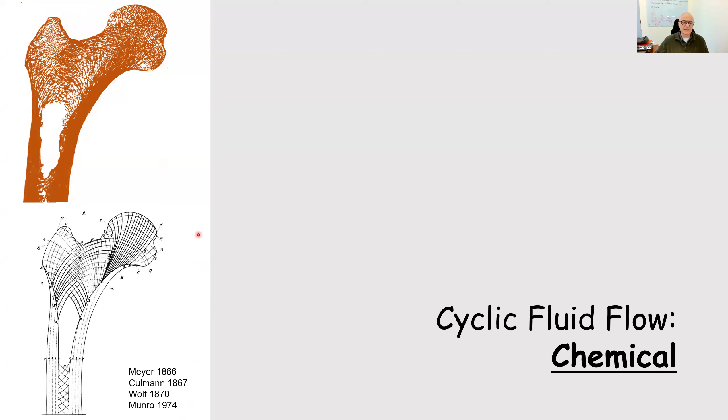So that was understood then, more than a century ago, but it was really not clear until 1974 when a paper said, you know, it is so important that we do exercise. And why? Imagine that the bone is made of the osteocanal and canaliculae that transfer the nutrients in and out of the bone to feed the bone, to maintain the bone alive and growing.

So what is the effect of mechanical action? Why does an astronaut need to be running with springs holding them back to replace gravity, so they don't experience bone mass loss?

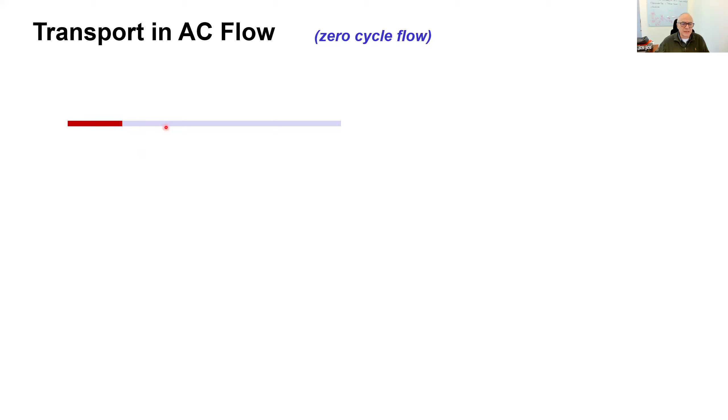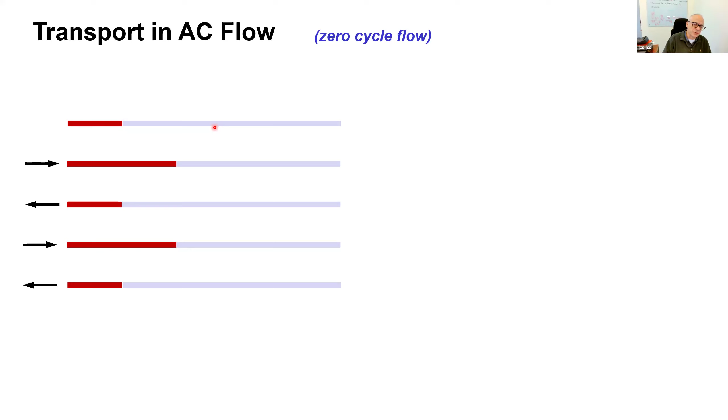Let's see what happens. Imagine I have a red fluid invading a tube, going in and out. The red fluid invades, then comes back, and the blue fluid pushes to the left, and vice versa. So nothing really happens. Now imagine this is a canal, a tube, but with large pores in the bones.

These pores are called canaliculae and lacunae, using the Latin words for lakes and canals. So the red fluid invades, and when it reaches the pore, it puts some of the red into the pore and mixes with the blue, and you see the color emerging.

Then when it's pulled back, some of the blue comes with it, and more blue invades the pore. Then we push it back in, and some of the red that was in the pore is pushed to the next pore. All of a sudden, by going back and forth, there is zero effective fluid flow, yet there is transport of species.

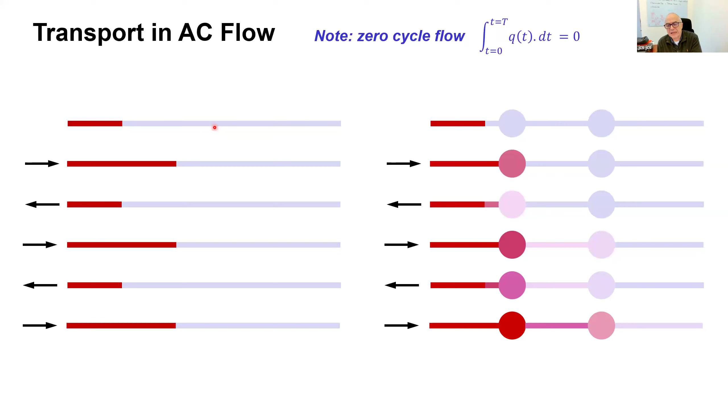So there is transport of a species with zero time-average advection. When we superimpose a mixing process with an advective cyclic process, you can convince yourself, if you carefully do the mathematics, that this begins to look in some asymptotic approximation like Fick's law: the first time variation of concentration is related to the second variation in space by the diffusion coefficient.

And what is the diffusion coefficient? Mathematically, you can prove it's the volume you are injecting over the volume of a lacuna, times the distance between lacunae squared, over the period of the cycle. What a beautiful equation - a length scale squared over a time scale, the essence of diffusion, scaled by the relative volumes of injection with respect to the characteristic internal volume of the system.

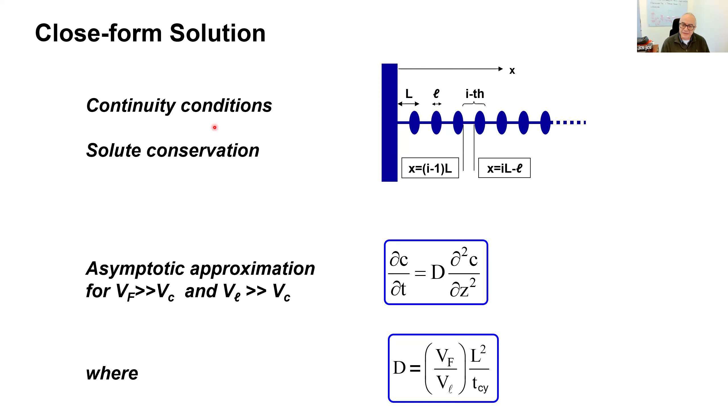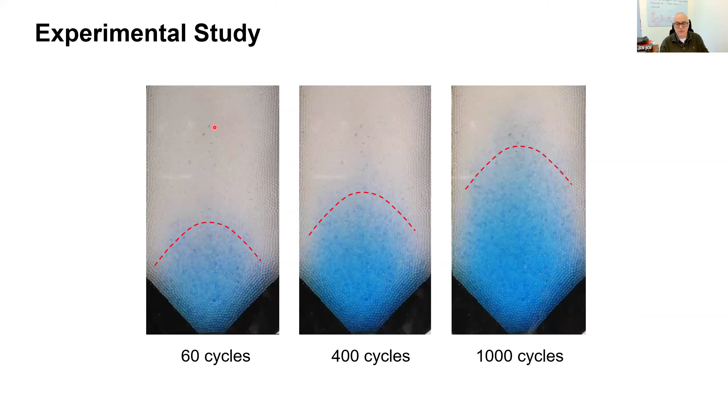Let's see if this is true. Here there is a glass bead pack with water, and we pull in and out water with methylene blue, always injecting and extracting the same volume. You see there is an effective diffusion front taking place - equivalent diffusion. This is much, much faster than pure diffusion, which almost vanishes in this context. Diffusion is on the order of 10 to the minus 9 meters squared per second, but these are much faster processes because of this scaling relationship.

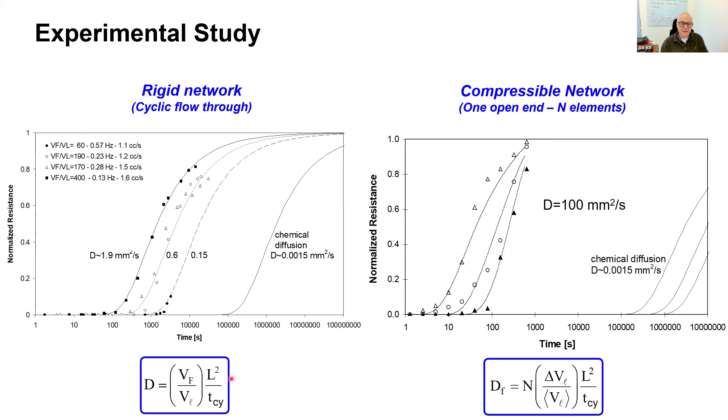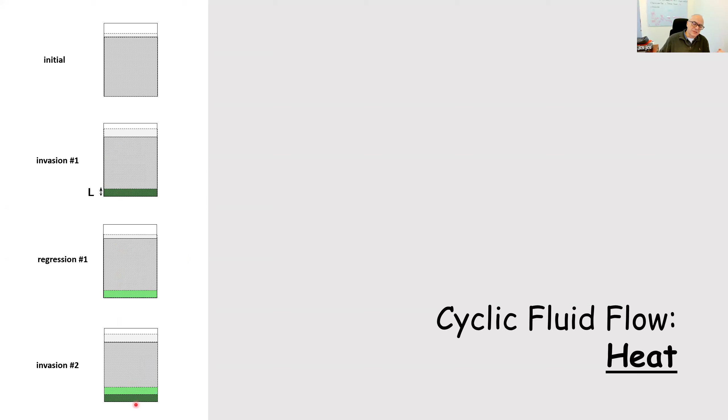So we can accelerate transport by injecting and pulling, injecting and pulling. Now, if that happens with chemical species, what about heat? Could I inject a hot front, leave some of the heat in the glass beads or the matrix, pull the water out, inject new hot water in, and will there be transport?

Well, first we need to see that there is an internal time scale, not for mixing, but for heat exchange. If you take a grain, put a thermocouple inside, dip it in hot water, then bring it to cold water, there is a characteristic time for that grain to transfer its heat to the cold water. That characteristic time appears in an exponential, as t over tau, and that is a very characteristic time.

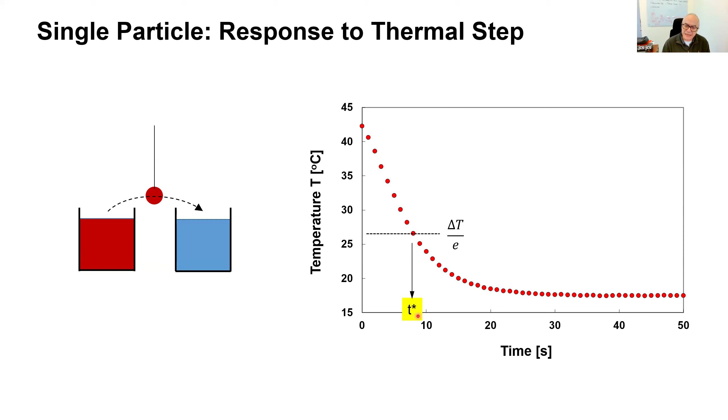In this case it takes a few seconds. So we want to inject water and let it stay long enough so the grains absorb the heat, then pull it back out, then inject back in, allowing that internal time scale to manifest. When we do that mathematically, all of a sudden we've reached something equivalent to the diffusion equation, but now for heat transfer.

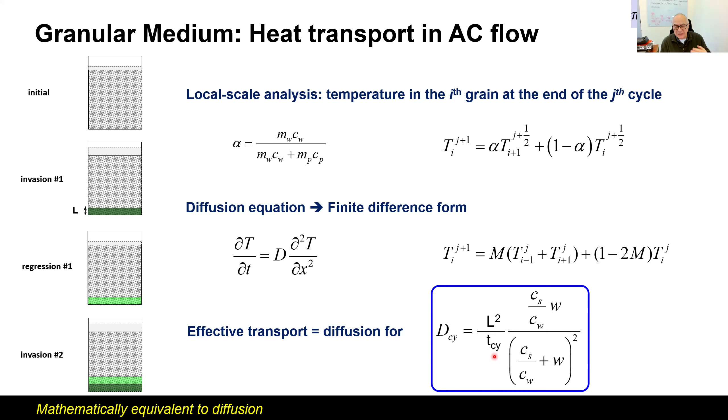Now we are in Fourier's realm. The diffusion coefficient is also scaled by the specific heat and the volumetric water fractions, but most importantly, it's related to an internal length scale and the characteristic time scale of the cycles. Just so elegant - we can very effectively transfer heat this way without having permanent advection.

We did this with a column. The column has thermocouples all the way along, and indeed we confirm that this is the case.

Now there are other processes in our body interacting through cycles. For example, we breathe in, and in cold weather like Alberta today, or even Atlanta today, the relative humidity in our heated rooms will probably be on the order of 40% or less. However, when we breathe out, that dry air that went into the lungs comes back out through lungs saturated with water.

That is where CO2 and oxygen get exchanged with the blood system. So when we breathe out, it picks up not only the CO2 but also moisture, and the breath we exhale is pretty much at 100% relative humidity. That means every time we breathe in and out, we lose weight because of the CO2 and moisture lost.

CO2 is heavy compared to oxygen, but we also lose weight because of evaporation. We release water. If you measure yourselves before you go to sleep at night and when you wake up in the morning, you'll see that you lose 200 to 300 grams, primarily water that you have lost. So we reproduce this in the laboratory.

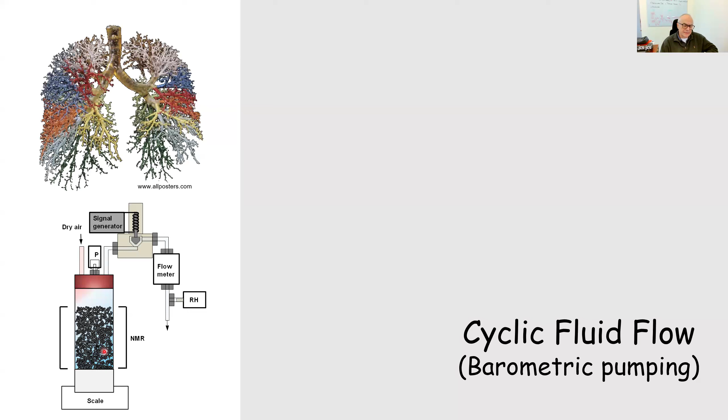This is the granular packing in order to understand the atmospheric interaction with the subsurface, where the subsurface is unsaturated. There is a very precise protocol that we follow, and we measure the relative humidity coming out, etc. We put the specimen inside the nuclear magnetic system so we can see the evolution of moisture content. Indeed, we have a very effective way of transporting moisture out of the granular medium, the atmosphere-subsurface interaction.

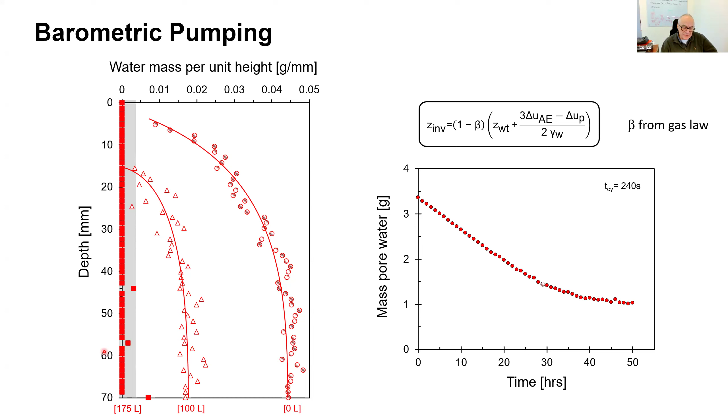Similar to our lungs. Now, something else happens in our lungs during these cycles. For those of you in petroleum geomechanics, I think you'll find this of interest, but this applies to all unsaturated soils as well. In our lungs, we have something that looks like detergent. Detergent is a surfactant. What we have in the lungs has a fancy name, pulmonary surfactants. Pulmonary refers to the lungs, surfactant meaning detergent.

So every time we breathe in, the alveoli expand, and at that point the interfacial tension of the water on the surface of the alveoli is pretty much the interfacial tension of water in a glass, 72 millinewtons per meter. However, when we breathe out and the alveoli contract, all the surfactants come close to each other and they repel each other, bringing the surface tension dramatically down, to less than 10 millinewtons per meter.

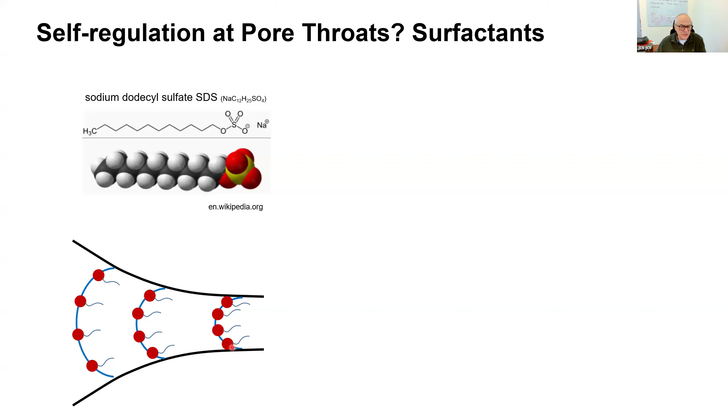However, if instead of these very small molecules, small compared to particles, we had particles instead of molecules, the particles would form a shell, and the surface tension would go crazy. Instead of being in tension, it becomes in compression, and you see that when a droplet contracts with nanoparticles on the surface, it actually buckles as a shell. So there are lots of processes that happen every time we go through a pore throat in a soil, a sandstone, or a shale.

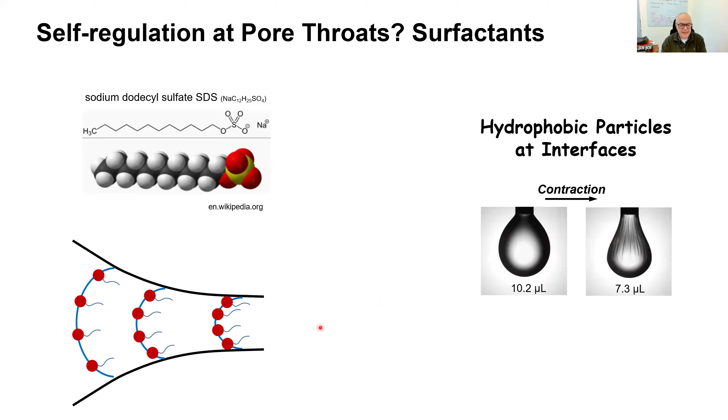Now, there are many other cycles in our lungs that we think happen, and we can use this in natural and engineered systems. One is the many cycles in our bodies, and the other I would like to highlight is the pumping of the heart. As you see, it's not very regular—it produces a high pressure pulse, and then it decreases.

Why does the heart work like that? They have tried to replace the heart with artificial hearts, which are peristaltic pumps just continuously pushing the blood, and the body doesn't like it. So why is it so important that we have these pressure cycles? It would probably take a longer time to discuss, but let me tell you some of the things we can do in geomechanics.

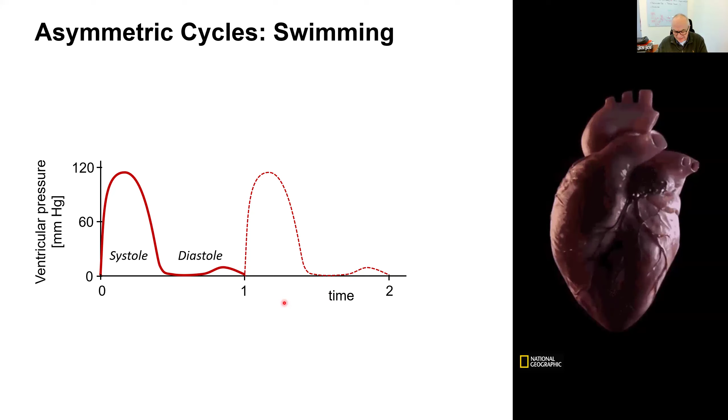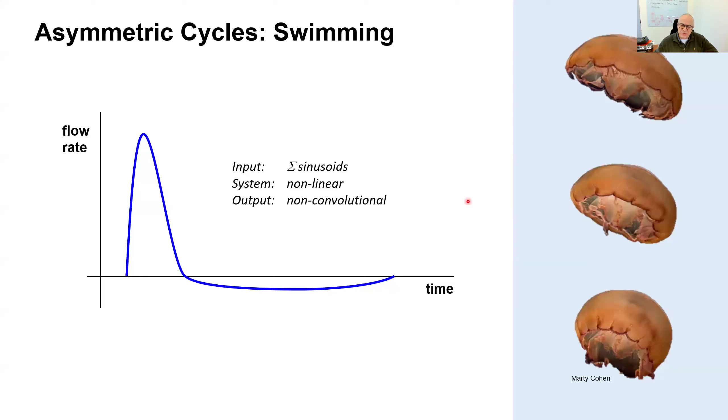With a syringe, I'm going to pump water fast. When it goes fast, it drags the particle. Now I'm going to pull the syringe back, but very slowly. At this point, the drag force is not high enough to drag the particle, so it remains. Then we pump again, push the particle, and withdraw the water slowly. We push the particle, and indeed we cause fines migration, and we can migrate proppants.

Very interesting opportunities for hydraulic fracture and reservoir preparation for production.

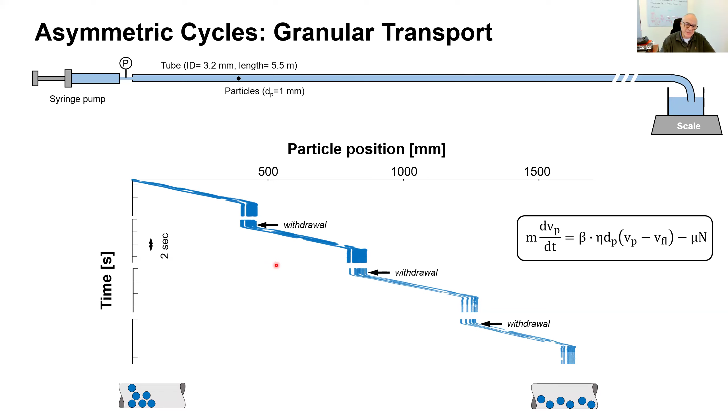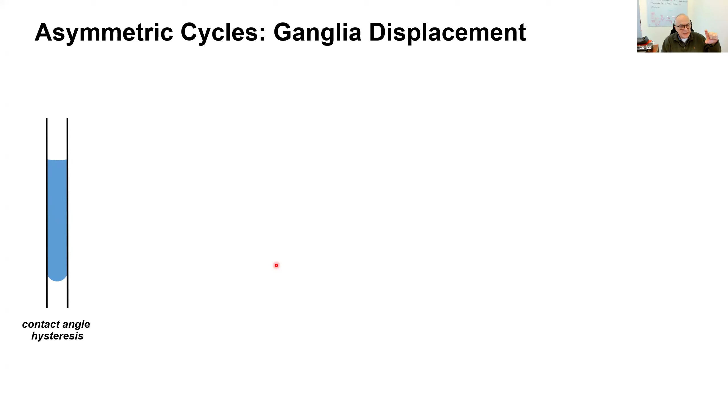We can do the same if you take a test tube. By knocking the test tube and counting on the contact angle hysteresis, I can move that droplet up, or I can move it sideways at will. This is experimental data to show you.

Cyclic effects on fluids are beautiful, folks, for mixing, for species transport, for heat transport, for moving particles throughout the system. Really exceptional opportunity. Now, many of you are in geomechanics, and that is an amazing program in geomechanics.

So I'm going to jump now to a few examples on geomechanics. We have to realize that the soil can experience different stress paths. This is in tau-sigma space, the q-p space, but it's basically shear versus mean stress.

It could be, how does a point feel on the side of a laterally loaded pile, or on the sides of a vertically loaded pile, or in a pile subjected to deviatoric loading with fluctuation of the water elevation, or just repetitive loading on a foundation. So we have different stress paths.

What happens to the soil? If you take the standard constitutive models, elasticity of course, but even if you take Cam Clay, once you push the yield surface out, then when you come back, you're done, you're in the elastic regime, so you cannot push the yield surface out anymore. Clearly this violates the fundamental constitutive models that we use in our field. So how does it really work? Let me give you a few examples.

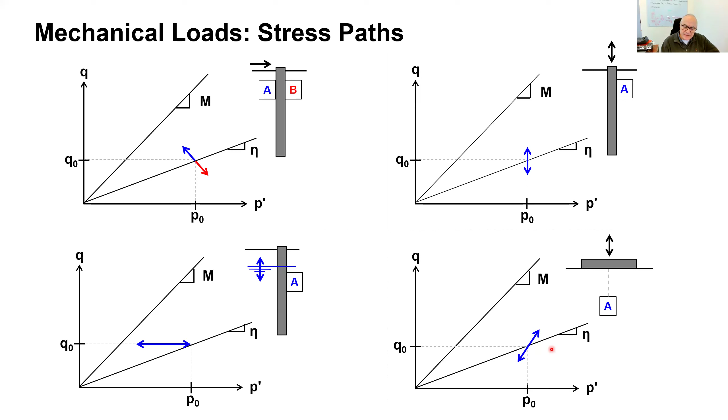The first one is, if you do this in an oedometer with zero lateral strain, you prepare a specimen, load it monotonically in different steps, and then at this step you unload and reload, unload and reload. We go through 10,000 cycles, and you see that the void ratio has decreased significantly. Then we keep loading, and the material goes back towards the virgin curve, but it has experienced this aging, this compaction due to repetitive loads.

Let me tell you something important here. The strain levels in each cycle may be very small. Each cycle may be causing an elastic strain on the order of 10 to the minus 5, 10 to the minus 6, and still leads to the accumulation of volumetric strains. Of course, if it is dense, these volumetric strains are going to be smaller than if it is loose, but still it is going to happen.

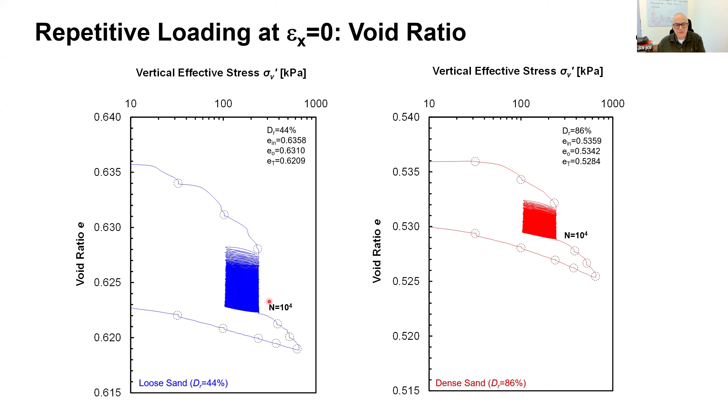This equation fits most of this volumetric data very well. It's a form of a power law. If you take the terminal void ratio, which is at an infinite number of cycles, it will go to an asymptote. This whole process will have an asymptote at an infinite number of cycles. How do I know that? Because the volume cannot go negative. At some point, the volume of voids will decrease, but it cannot go less than zero. In fact, it goes to a characteristic value for each condition and loading sequence. So I have these equations, and I can predict this propagation now quite well with these empirical equations.

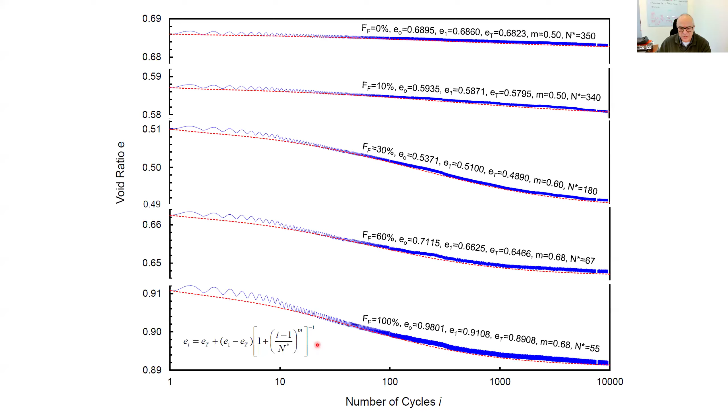Now what happens with the shear? We have to look not only at the volume evolution, but also the shear evolution. Shear is tricky, because while the volume will have to go to an asymptotic value, shear can continue accumulating in every cycle like a ratchet.

This is the classical drawing from Leonardo. Every time you turn, it locks in the new notch, and it keeps deforming, and the same can happen to a soil. But let me give you a hint: it will only happen when the amount of shear on top of the initial shear - this is the cyclic shear on top of the initial constant deviatoric load the system is subjected to - approaches failure.

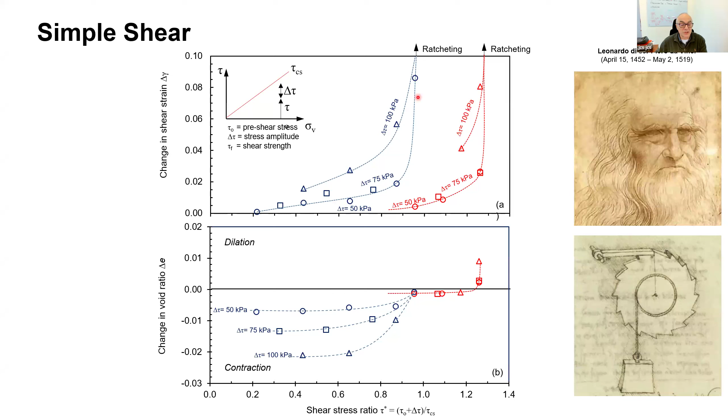If you are far away from failure, you are not going to ratchet. You are going to go to an asymptotic state in shear as well. That is called shakedown. Away from failure, you are in the shakedown regime. As you approach failure, you go into the ratcheting mode, and the shear strains will accumulate forever, and the slopes will continue going down.

So I already presented repetitive loading in K0. I'll show you the case of a simple shear now.

There are other ways to add changes in mean and deviatoric stress in soils, and one of them is by changing the pore fluid pressure. So we load the specimen to a certain deviatoric stress, we maintain the deviatoric stress, and we change the pore pressure, and it can bring the system to failure. But we control how far or how close we want to go.

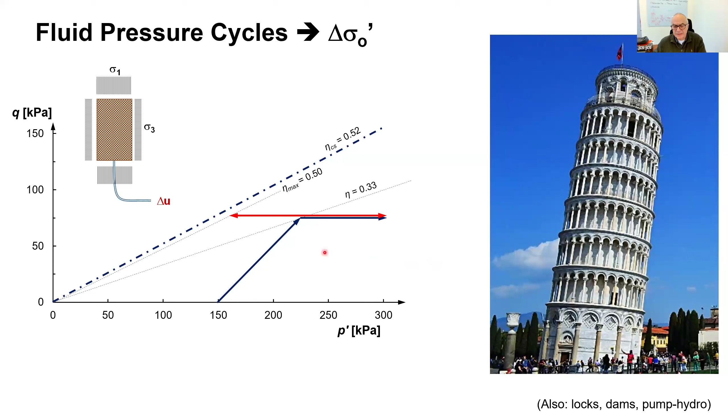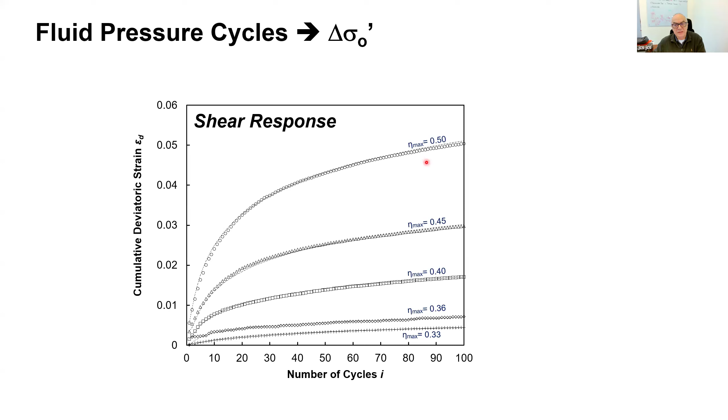That is, by the way, what was going on with the foundation of the Tower of Pisa with successive pumping. And indeed, if we are close to failure initially, close to the deviatoric load approaching failure conditions, we are going to have very pronounced displacements and accumulation of shear displacement.

So now, let's summarize what we have said out of these three cases. From a point of view of volumetric evolution, it has to go to an asymptote. You cannot have negative volume, so it will approach an asymptote.

This asymptote is not critical state. Critical state, by the way, doesn't really happen either, but critical state is an idealized limiting condition for monotonic shear. This is not monotonic shear, so it will approach its own limit state, an asymptotic state.

This is in volume. In shear, it can either stabilize at some point or continue accumulating shear forever, and that is the shakedown and ratcheting modes.

But as I said in the last slide, after a very large number of cycles, you are not going to have any more volumetric strains, but you may still have shear strains, and so we're beginning to violate normality.

So folks, we need new data sets, we need new models, we need new constitutive models, but we also need new numerical algorithms, so there is no numerical error accumulation.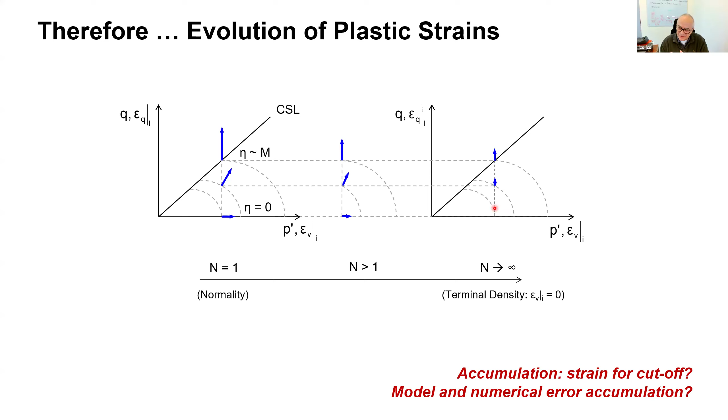And so every so often we have to check with asymptotic trends to make sure that what we are accumulating is not numerical error. As I mentioned in passing, you can accumulate strains at very, very small cyclic strains, much smaller than the elastic threshold strain that came up from the liquefaction literature. I think of Dobry and Vucetic, or Ishihara's data, etc., or the project by Robertson in Canada.

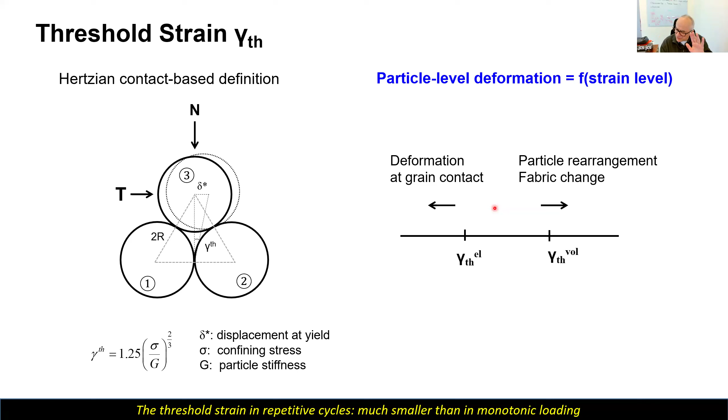We can have strain accumulation in cyclic processes. Of course, when we're thinking of 10,000, 100,000, million cycles, even if each cycle produces a very minute strain, that leads to very beautiful physical discussions that we can address later on.

So now to conclude, I'm going to give you some other examples. The third segment will be on other examples where the cyclic processes trigger coupled processes in our geomaterial. So let's take some examples.

But first of all, we have to say, why is there coupling? There is coupling for two reasons. One is thermodynamics, energy conservation, and it says that nature will conserve energy. The other one is Le Chatelier's principle, and it says that nature will do everything it can to oppose change. If you combine these two, you convince yourself that all forms of energy are always coupled.

For example, if you take a rubber band, not all rubber bands will give you this effect in a way that you can sense it, but try a few rubber bands, they all do it, but you cannot sense it with your lips. Try a rubber band, stretch it and feel it with your lips, and you'll see when you stretch it, it's hotter than when you just started. And then if you relax it, you will see that it will be quite cold.

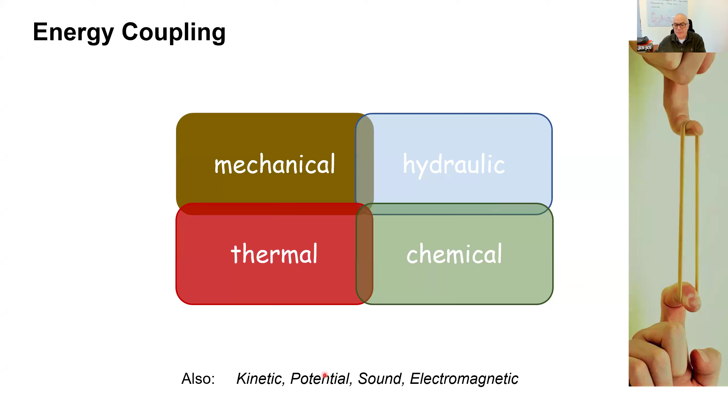Very clearly, we have thermomechanical coupling, and in fact, we have all these other forms of coupling. There are other forms of energy, and they're indeed all coupled. Let me focus on some of these examples.

Now we have to think of what is the nature of coupling beyond the global macro-scale physics. What is the causality at the particle scale in soils? Well, we have to think of all the forces that act on a particle.

The force that it has to carry for being part of the granular skeleton subjected to effective stress, the self-weight, the buoyant force, the hydrodynamic drag, capillarity, attraction, repulsion, thermoelasticity, and cementation.

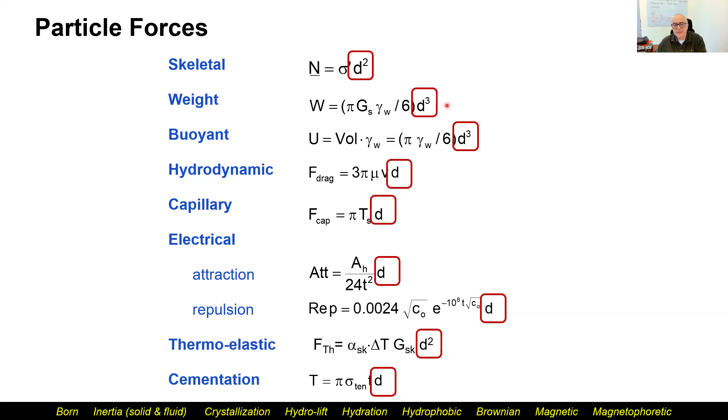Now you see that all of these are asymptotic equations. I purposely wanted to get them in a power form, either linear, quadratic, or cubic with the size of the particle. That means that when I plot these forces in logarithmic scale, they're going to have a slope 1, slope 2, and a slope 3, and the lines are going to intersect. What does that mean?

Well, for example, the self-weight of a particle is equal to the capillary force that particle can experience until the particles are about 3 millimeters. Large particles, self-weight is more important than capillarity. You cannot pick up an orange with another orange just by wetting it. However, you can pick up a small grain of sand with another wet grain of sand because the capillarity at that point is greater than the self-weight. And that is the essence for sand castles. I can do the same with all other forces and convince myself that there are different regimes where one force governs or another force governs.

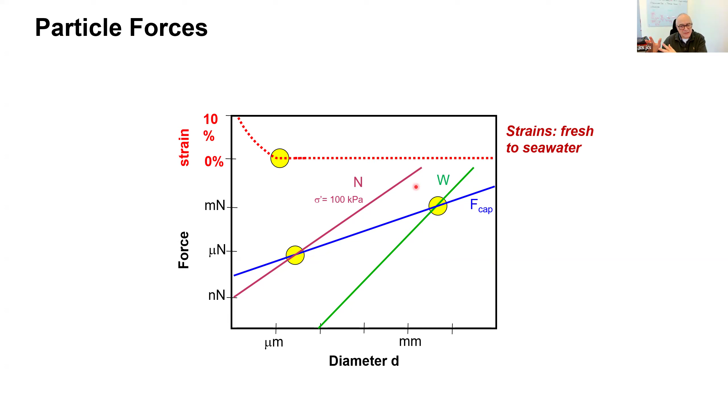To conclude the story and make it simple, coupling effects are very important starting with silt and primarily with clay. They're really not that important in coarse grain materials.

So let's look at the chemical coupling, and because chemical coupling is relevant to fine grain materials, let's understand why, and that is because of the double layer theory and van der Waals attraction, something called DLVO, the first letter of four last names, which combines van der Waals attraction and double layer repulsion, and I can change it by changing the ionic concentration of the fluid.

So now I can make cycles of high and low concentration, and you will see that silica flour experiences almost no strain. Kaolin will experience some strain, bentonite quite significant strain. And of course, the higher the specific surface and the smaller the stress that the soil is subjected to, the higher this effect will be.

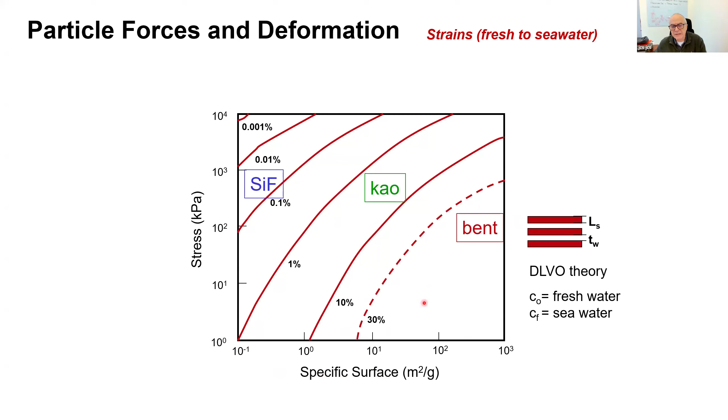So now let's do an experiment. This is an oedometer filled with a kaolin specimen, saturated, and I run deionized water, and then I switch it here without changing the pressure. I run brine for many days. This experiment took 1.5 years, and we did only 6 cycles.

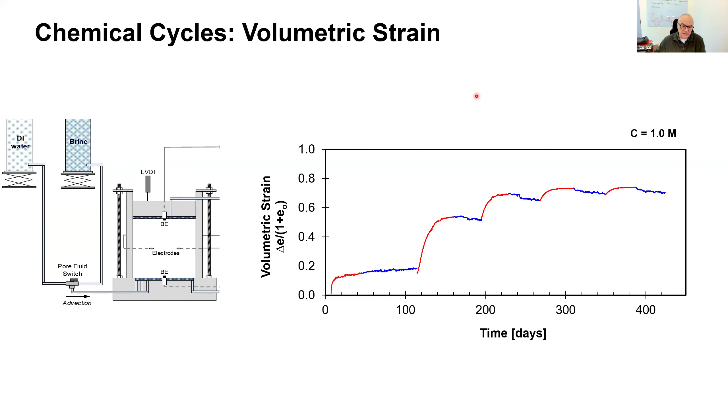And then I switch back and forth, and back and forth, and you see how the specimen begins to contract when you subject it to high ionic concentration, a little bit of expansion when you run deionized water. Contraction, little bit of expansion, and once the soil contracts, it's very difficult to expand, the same as during oedometric loading. So very clear the effect of, let's say, saltwater intrusion cycles on the accumulation of strains around the continental margins.

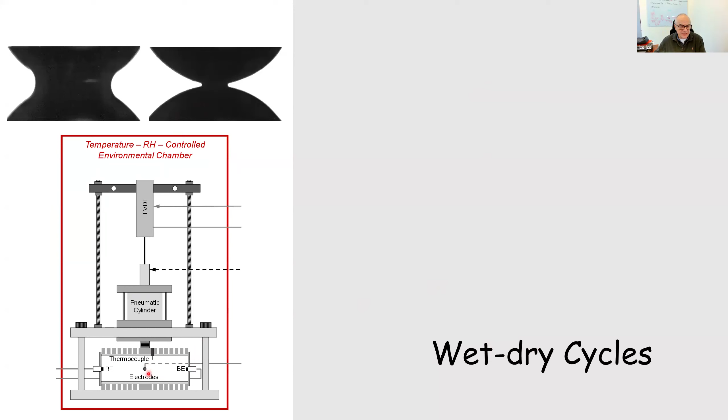What about wet-dry cycles? Capillarity can be quite important in small grain soils. So we do the same: we take a specimen, we apply an initial load, and then we subject it to wetting and drying cycles, and we see very pronounced contraction. The void ratio decreases quite significantly, and it follows a similar type of accumulation model.

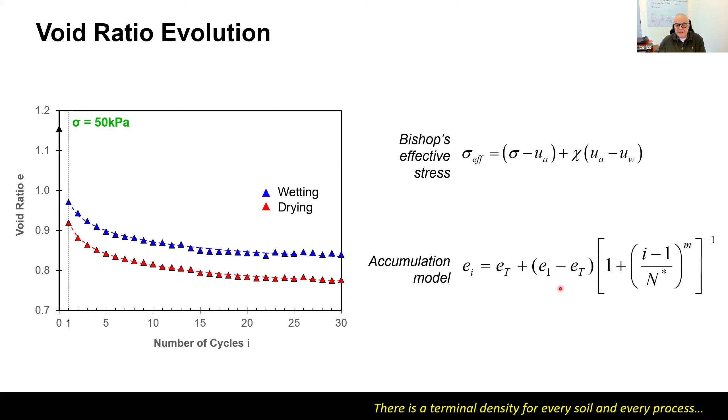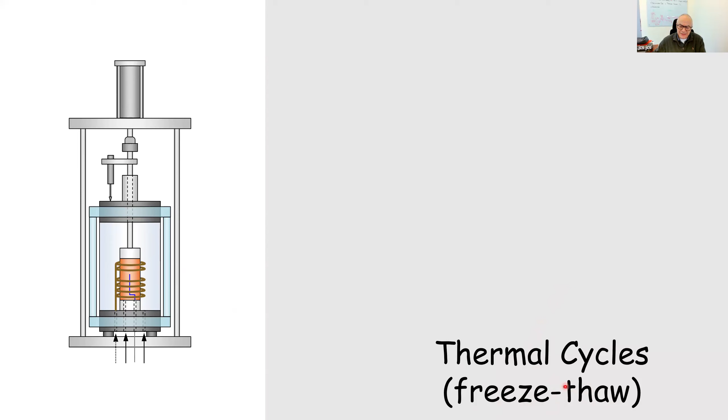What about thermal cycles? For you guys, freeze-thaw, but now this is affecting most of North America. And so freeze-thaw gets a little bit trickier, and let me explain why.

First of all, what happens with freeze-thaw is you begin cooling, then it stops cooling because you get phase transformation, then continues cooling, then during melting it begins heating up until it melts all the ice, and then it continues heating up, etc. Very classical phase transformation data. This is a thermocouple inside the specimen.

But if I look at the specimen, this is sand, saturated sand with ice - you don't see any ice lenses forming. Now, if I look at the same specimen inside the tomographer for a kaolin, I see all these ice lenses that have formed, almost like carrots invading the soil. In fact, the mechanics is exactly the same as roots growing inside the soil.

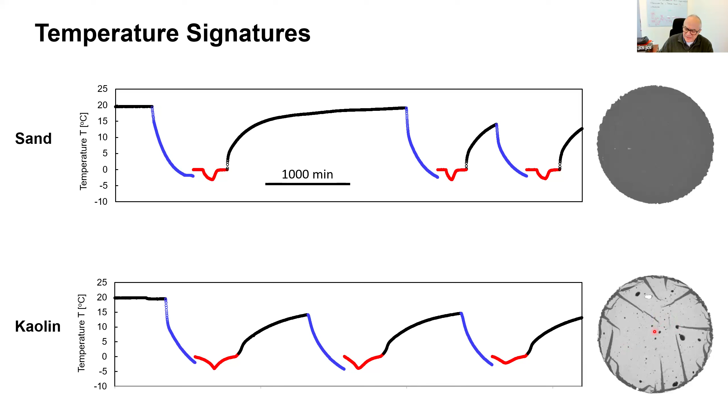Now, what happens is when the water melts here, it just drains out. But when the water melts in fine-grained soils, it doesn't escape so fast. And now we have a water film, water layers, which make the soil very sensitive - in the slope, it will come downhill. And that is what we capture in this sketch.

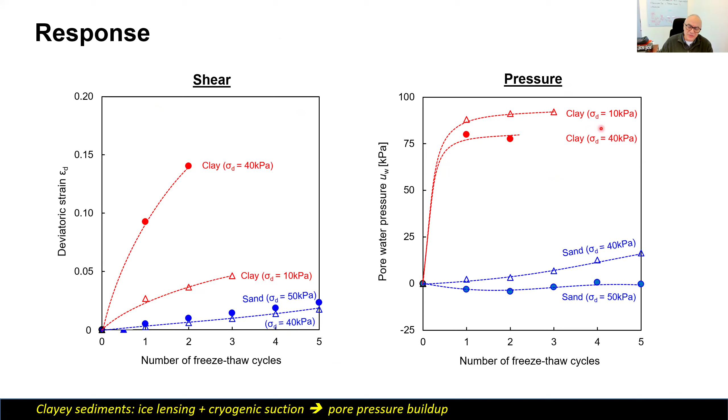This is the data that presents that, but I'm running out of time, so I don't want to dwell, but there are effects on shear and on volume, or in this case, on undrained behavior, which will be on pressure.

So finally, I didn't highlight this, but if you went back to the forces experienced by thermoelastic effects and the skeletal forces, both of them are proportional to the diameter squared. That means thermal effects will affect all geomaterials, thermal cycles, from a clay to boulders, because the diameter cancels out - the effect is independent of size.

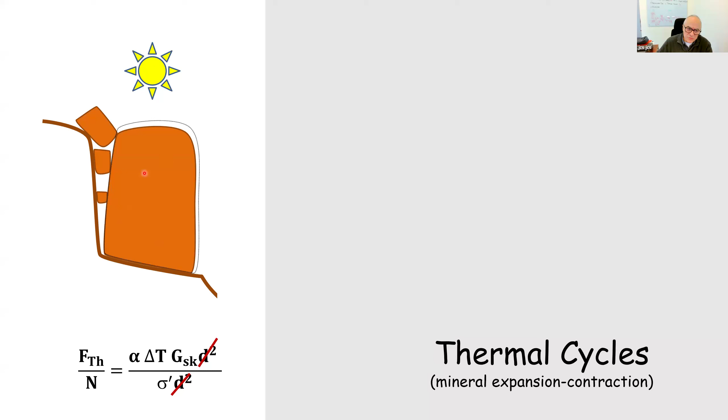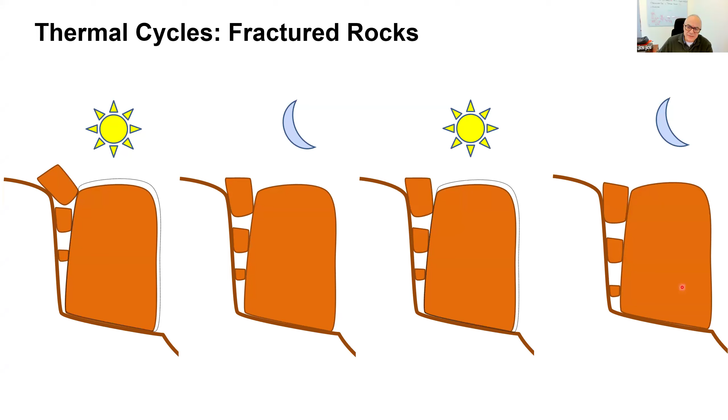And so let's see if that is true for large boulders. The idea is that when the sun hits the big rock mass, it expands towards the free space. Then when it cools, it contracts, but because of friction hysteresis, it will contract in such a way that the choke blocks will fall down. It expands again, contracts again, the choke blocks fall down further out, and this block is gradually pushed sideways. And we see these - look at this wedge.

Look at this wedge, it's moving. This is going to push it. This is not toppling—this is thermomechanical ratcheting. And look at these other wedges.

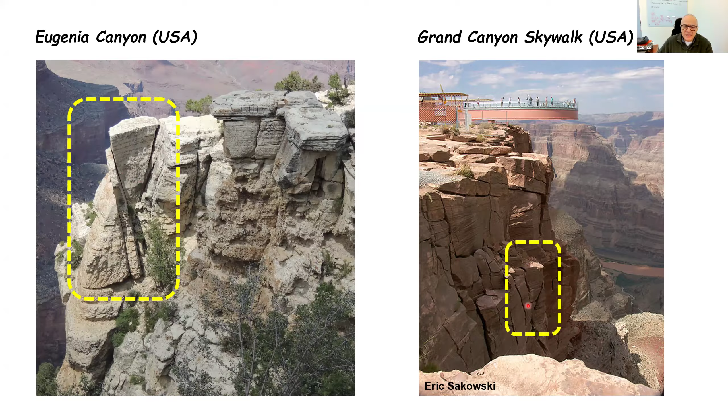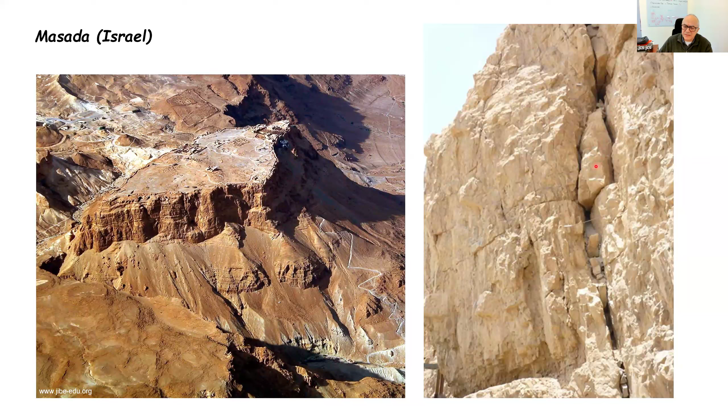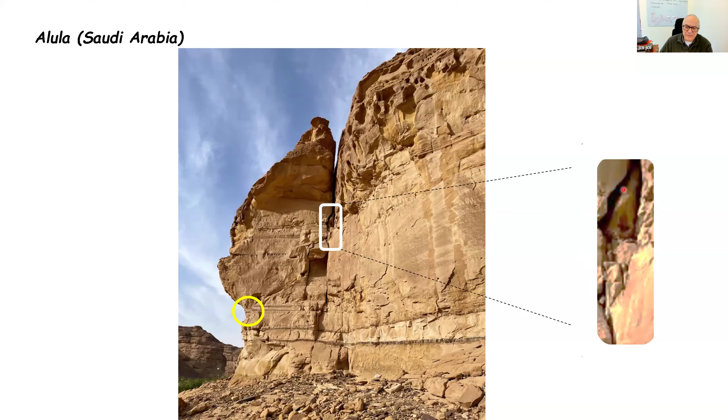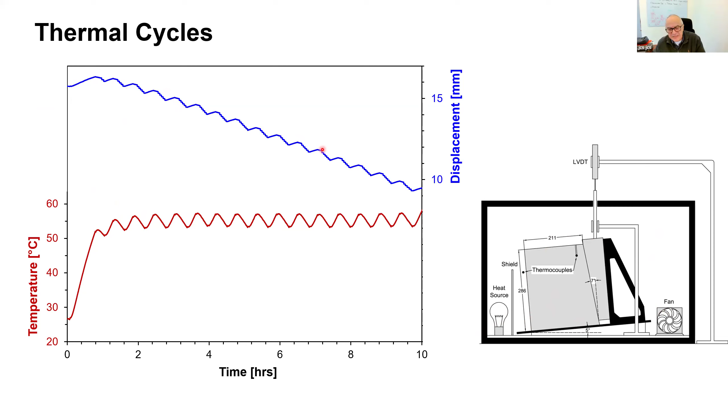So we reproduce this in the lab. This is the choke block in the front, and this is the other wedge, the resisting block at the front. We subject it to thermal cycles by increasing and decreasing the temperature of the room, and you see the thermal oscillation we created, and how the block comes down as it happens. You can do the mathematics and convince yourself that thermal ratcheting will take place.

Folks, we have come a long way. We have seen the effects of moving fluid back and forth, transferring a species, heat, even particles, causing particle migration, and the effects of hysteresis in contact angle, surfactants, and nanoparticles. Then we saw the effect of mechanical loads, and finally the coupled processes during cyclic phenomena.

So to conclude, repetitive loads are everywhere, and they come in all forms. We have to pay more attention. That's the reason why your driveways are breaking—not so much because it freezes, but because it freezes and thaws.

That's the reason Canadian Tire is so smart that by August it already has tanks of liquids to protect your driveway so the water doesn't get in to cause that crystallization.

The causality is complex and depends on the case, but it's strongly related to energy coupling—hydromechanical, mechanical-thermal, thermomechanical, chemomechanical, etc. It's also intimately related to hysteretic response and asymmetric excitation. You swim more actively in one direction than the other to have forward motion, and there is hysteretic response, for example, in contact angle.

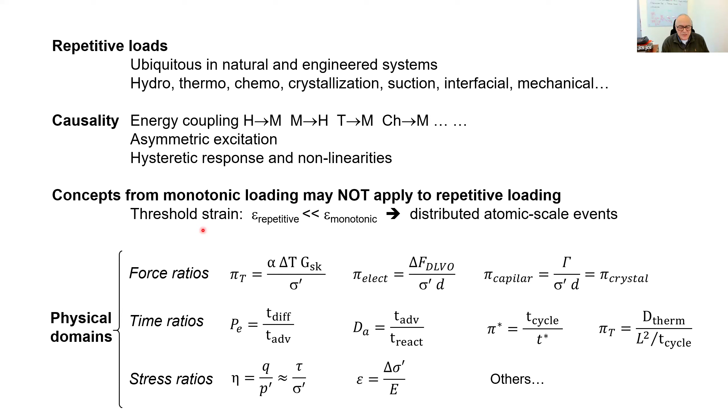We can always capture physics in nice dimensionless ratios, and here is a combination of dimensionless ratios that came out from today's presentation.

When you think of soils, for those of you strongly into soils, you have to think of two things: what will happen to the volumetric strains, and the shear strains. Volumetric strains will go to an asymptotic value and vanish. What happens to shear? It may continue accumulating forever.

In fact, long-term monitoring of some slopes shows how they are creeping, but really by cyclic motion, down like an accordion effect, coming downhill.

In the case of fluid flow, there is enhanced transport of everything: heat, vapor, species.

Phase transformations—be very careful with them, particularly in fine-grained soils, because the crystal growth is grain-displacing, while in sand it is pore-invasive and doesn't affect the fabric much.

Thermomechanical cycles—you have to expect them to have an effect on any type of soil. So if you have a thermally active pile, very common nowadays particularly in Europe, when you have both strong summers and strong winters, those will have a tendency to interact with the medium, and if they are heavily loaded, they could lead to ratcheting.